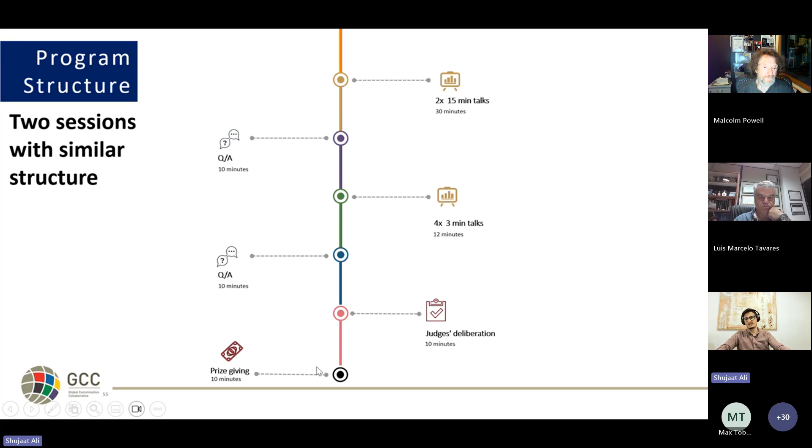And then this will repeat for a second session. At the end of the event, there will be a prize giving for 10 minutes.

A bit of information about our judges. I think it's important for you to know who is evaluating you today, and also your moderators. So in your judging team you have Professor Holga, Professor Malcolm Powell, Professor Rodrigo, Dr. Grant Valentine, and Dr. Sherry.

And please, again, try to enjoy your talks. It's a very comfortable, relaxed environment. Don't feel pressurized, get the most out of it, and present the best way you can.

As for moderators, it will be myself, and I'll be accompanied by Maximilian in the first session, who will be moderating that. After that, I will show up again for the second session and moderate that.

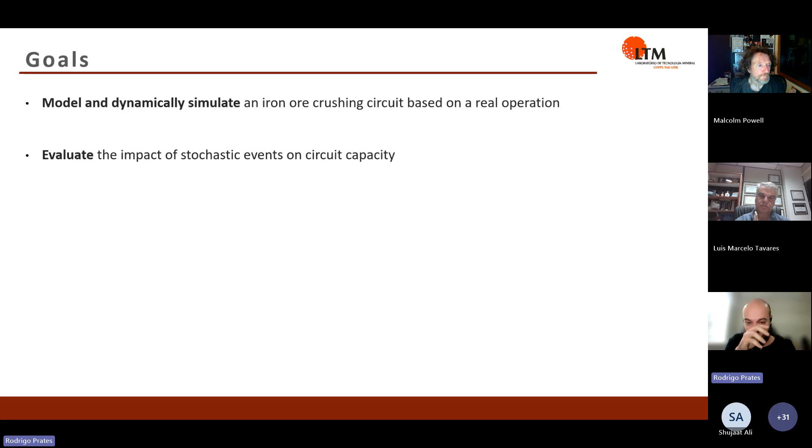So the goals will be to model and dynamically simulate an iron ore crushing circuit, and then to evaluate the impact of these stochastic events on the capacity of this circuit.

Then the product of the secondary crushing stage goes to a set of 12 silos that will feed two deck screens, where the material retained on those decks goes to the tertiary and quaternary crushing stages, and the product of both of these stages comes back to the screening to be classified again. Then the passing material on those screens is the product of the circuit and goes to the grinding stage.

So on all of the crushing stages and screening after the stockpile, we have a system of trippers that are responsible for distributing the material alongside the silos, and that is done by a control system that works based on different sensors alongside the circuit.

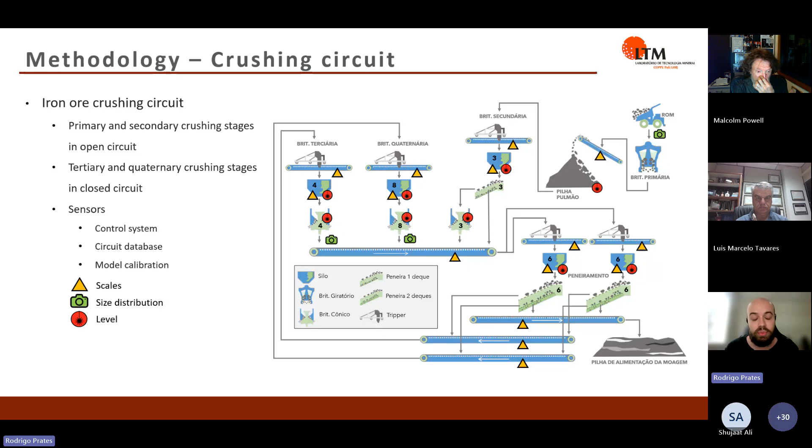So we have scales on all conveyor belts and feeders, also some level measurements and size distribution sensors as well. The control system uses all that information for the operational logic, and also to build up a circuit database that we use for model calibration.

So the idea was initially to do the mathematical modeling of the circuit, so the unit operations divided into dynamic and pseudo-dynamic units, then the operational logic being this control system, and then the stochastic events that would be the truck arrival and operational shutdowns.

Then we implemented the circuit on the MATLAB Simulink platform. With that, we can go for the model calibration that uses this database. We have over 1 year of information, both from all of the sensors and from stochastic events.

And with that, we go for the simulations of the circuit. So we used Monte Carlo simulations, 150 simulations of 30 days of operation, both for the circuit I just presented and for a modified version of it that I will talk about a bit later.

So to talk about the mathematical modeling of the units: for units that have a material residence time of minutes going up to hours, like silos, conveyor belts, and stockpiles, we used dynamic models. So we have material accumulation. And here I would like to highlight the modeling of the stockpiles and silos.

They are basically a first in, first out model, where the units are represented by a sequence of perfect mixers. For each mixer, we are solving the differential equations for mass balance, size distribution balance, and other properties. And for the conveyor belts, we are using a fixed time delay.

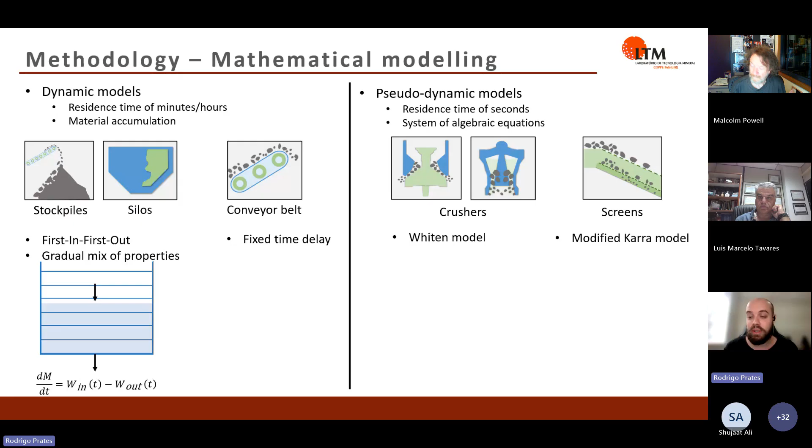And for the stochastic events, in the case of truck arrival, we are modeling the time between trucks and the ore mass per truck. For the operational shutdowns, we are talking about preventive maintenance, so scheduled maintenance, and also corrective maintenance that comes from failures. In this case, we are modeling the time between failures and the time to repair.

And to model all of these, we used the Minitab software to determine what was the best distribution in each case, so log normal distribution, Weibull distribution, and so on.

What I would like to highlight here is that if we do not model any of the operational shutdowns, the mean capacity of the circuit is around 2,900 tons per hour. This is a number I will come back to later.

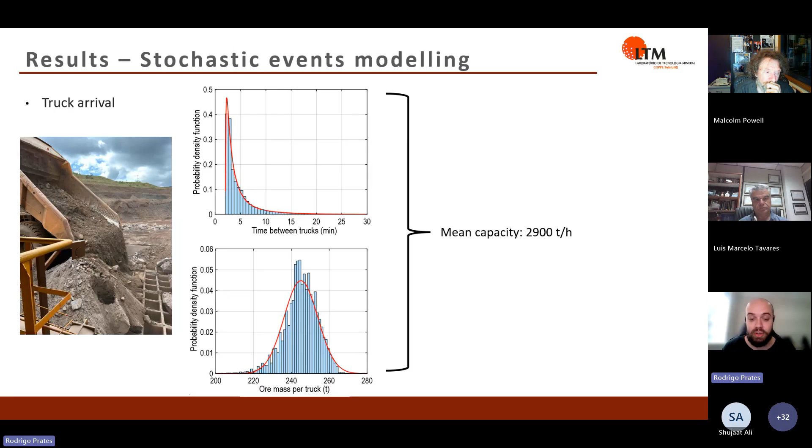The same thing happens for the primary crusher and the conveyor belt that transports the primary crusher product to the stockpile. So we grouped these equipments, and for each of these groups we have scheduled maintenance of 12 hours, and we also modeled the failures and corrective maintenance, so we have the time between failures and time to repair for both of them.

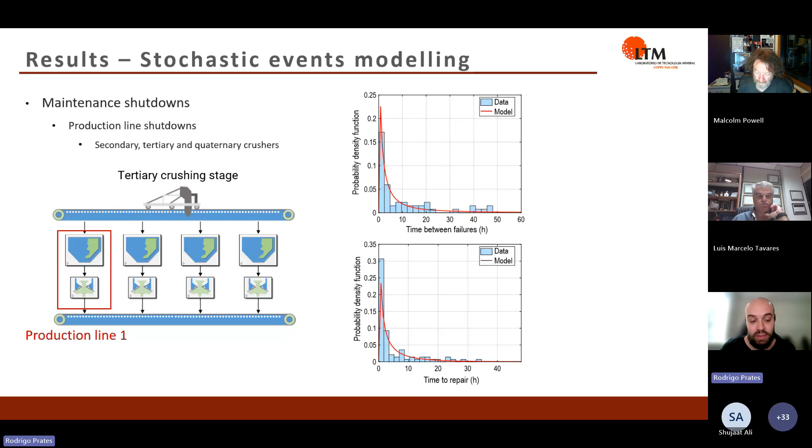Lastly, we also modeled the breakage of the other crushers, so secondary, tertiary, and quaternary crusher. But in this case, if one of these crushers fail, we don't need to stop the whole, for example, the whole tertiary crushing stage. We just need to stop one of the production lines, and it can be repaired.

During some times, for example after 48 hours of simulation, up to 60 hours, we don't have any material coming into the stockpile. That happens because we have some operational shutdown happening on the primary crushing stage, so that's why we have this stoppage.

For the discharge of the stockpile, on the other hand, it is made by a set of 6 feeders that are under the stockpile, and the number of feeders operating in parallel at different times depends on the stockpile level, which is controlled by some operational logic. That's why you see sometimes a discharge of around 3,000 tons per hour, and sometimes it decreases. Close to the 60-hour mark, it even got to 0, probably because the stockpile level got too low.

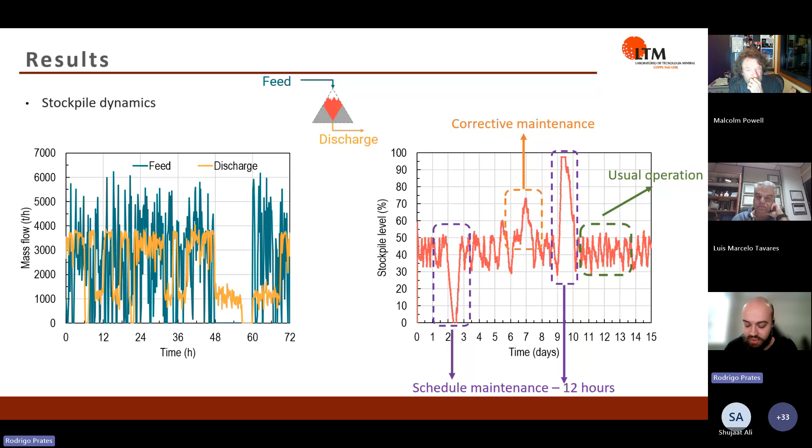But something we noticed is that the failure of individual crushers had no effect on circuit capacity, and that happens because this circuit is overdimensioned. For example, we only need 2 tertiary crushers to be able to process the amount of material that comes into this stage, but we have 4.

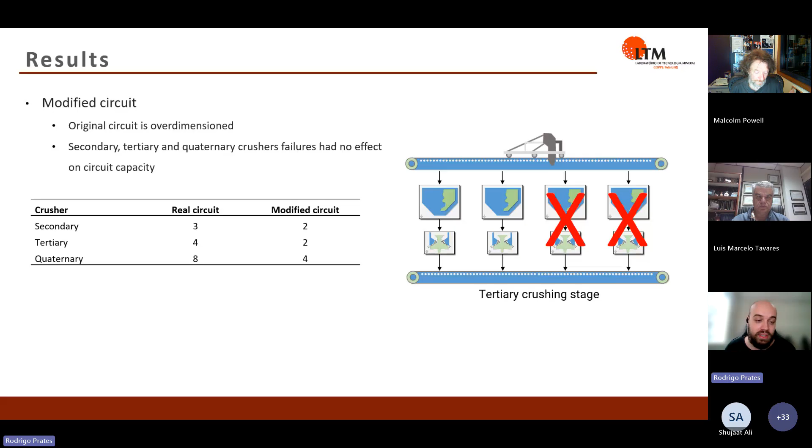So what we did was create this modified circuit where we reduced the amount of equipment. Let's focus on the tertiary for now, that goes from 4 to 2 crushers. And what happens in this case is that a lot of times we actually reach the maximum stockpile level because we need to stop the stockpile discharge.

Since these crushers failed, we don't have enough equipment to process the amount of material that is coming from the stockpile, so we need to reduce the capacity or stop the circuit during some time. With that, you can see that our monthly production decreases even more.

So for the original circuit without shutdowns, we have around 2,900 tons per hour, and we got up to 600 tons per hour less with this modified circuit with the shutdowns.

So some conclusions of this work. First, it was possible to dynamically simulate this industrial iron ore crushing plant.

The modeling of maintenance shutdowns led to a 16% decrease in circuit capacity, showcasing the importance of taking that into consideration. These simulations with a modified circuit showcased the importance of equipment redundancy to absorb these eventual failures. You don't need to use all 4 crushers, but if you don't have them, maybe sometimes you end up losing capacity.

For the future steps of this work, with the further development of the control system and addition of stuff like equipment wear, we plan to daily use the simulator as a digital twin of the circuits, both for supporting decision making and, in the end, maybe participation in the circuit's automation.

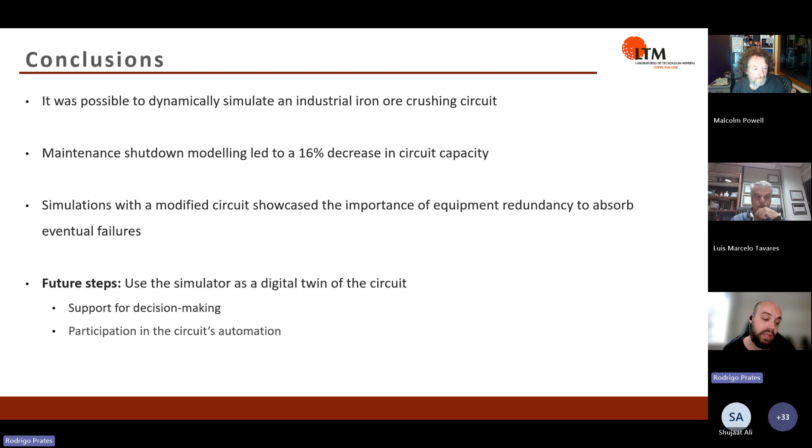Thank you, Rodrigo, for this nice talk, especially regarding the time in Brazil, 6 a.m. Very interesting talk, and also congratulations on finishing your masters and now working as a PhD. I would like to encourage people to send their questions into the chat. And perfect timing, Rodrigo. Next on the stage, I would like to welcome Kabeli from UCT. The question session will be after the talk of Kabeli.

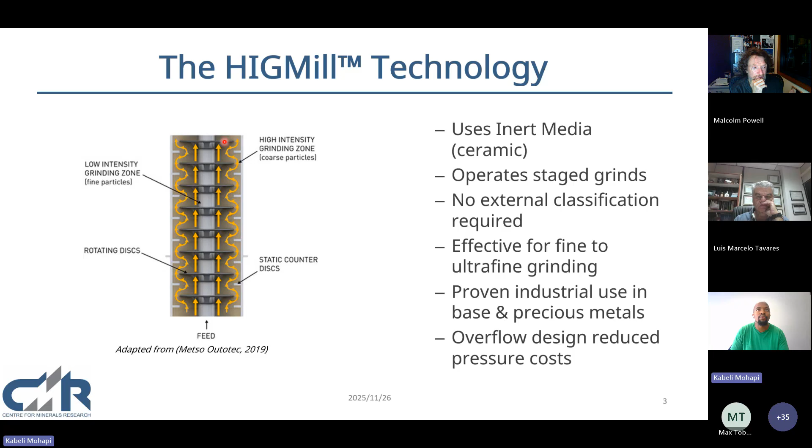The application of stirred milling in the mineral processing industry has seen significant growth, inspired by Anglo Platinum, which is now Valterra. They utilize an ISA mill, which has been proven to enable tailings retreatment on oxidized and slow floating PGMs. Its application in the PGM industry includes mainstream inert grinding, where they optimize recovery, and ultrafine grinding, where it is utilized to optimize grade.

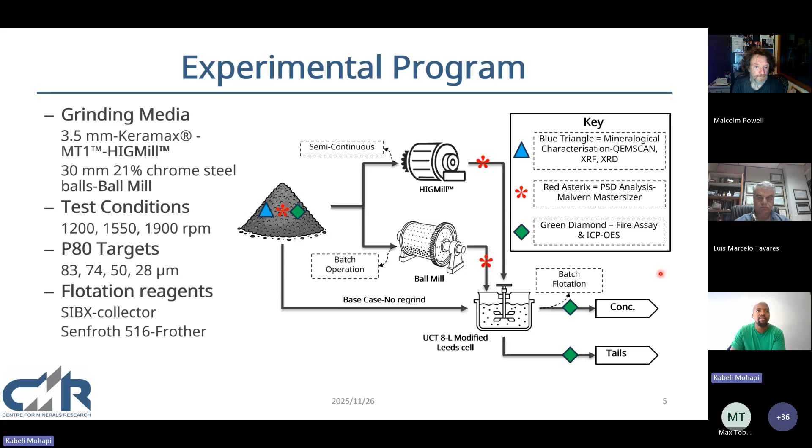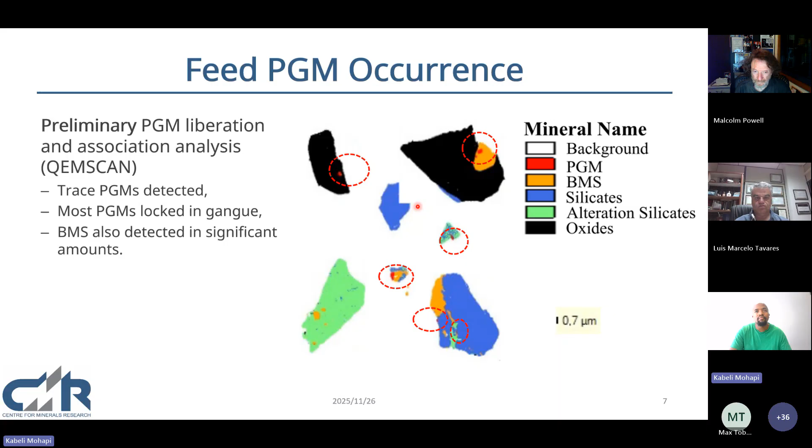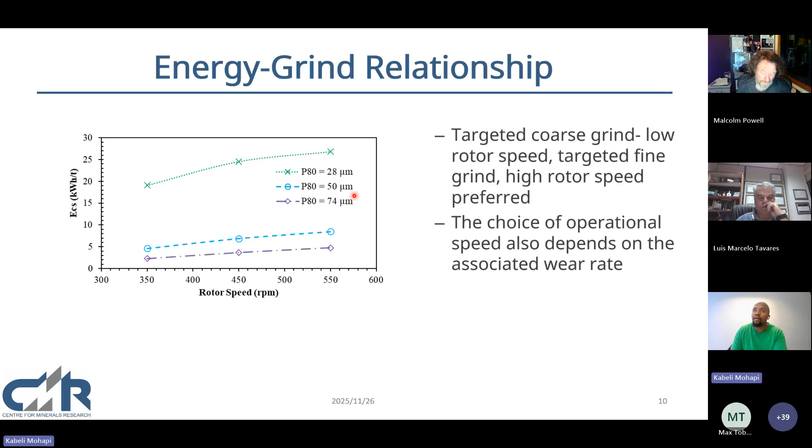However, as much as this data could show that operating at high speeds in stirred milling would be beneficial, there's also a potential impact of grinding media wear and equipment wear, which was outside the scope of this research. Hence, although it's possible to go very high in rotor speed in stirred milling devices, sometimes it's not necessary, as it could lead to other costs, including wear rate and machine wear.

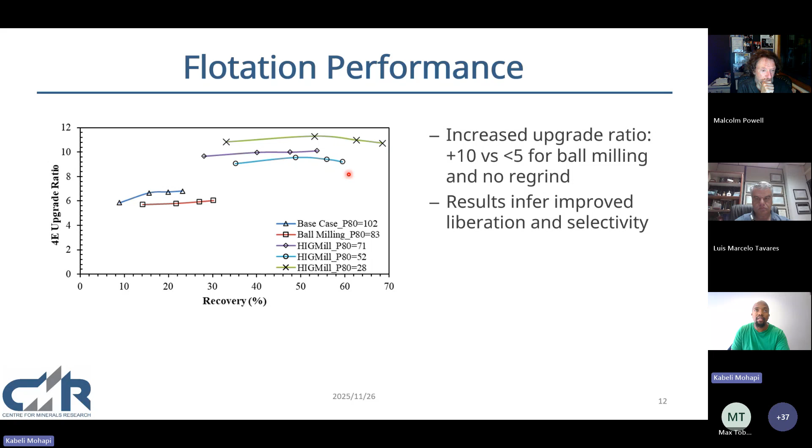Okay, I'm almost there, this is the second last one. In this graph, we show the relationship between the upgrade ratio and the recovery for 4E recovery. We can see that the upgrade ratio achieved in stirred milling is significantly higher than the upgrade ratios achieved in ball milling in the baseline condition.

With that, the authors did conclude that although there could be improvements in ball milling, they are limited by the residence times usually required, resulting in minimal recovery improvement. Stirred milling showed high improvements and was very efficient in energy use. We recommend performing more studies on other stirred mills, as in this study we also used the HIG mill, another mill which showed a similar response. Thank you everyone.

Okay, thank you. So the timer was still okay.

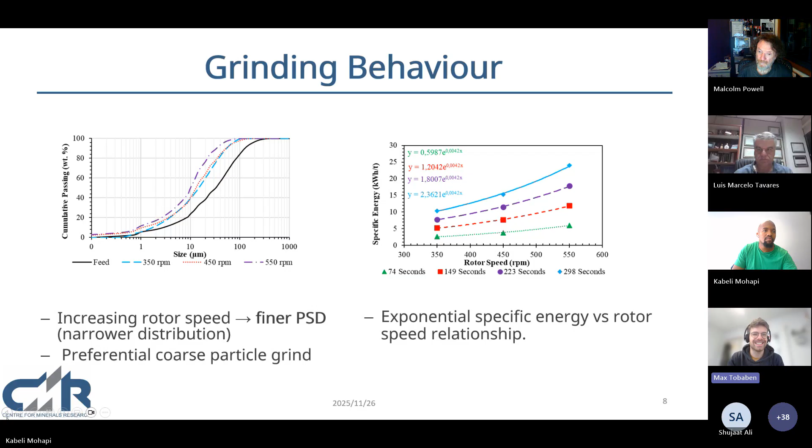Grant has a question. He's asking, given the small reduction in throughput with half the installed crushers, would you recommend installing standby crushers in the application? So, this specific circuit is way over-dimensioned, because we had some conversation with people from the operation about this, but they were planning - they thought a crusher would have a capacity of 400 tons per hour, and it ended up being double. So it's way over-dimensioned, but even so, I think having at least one crusher as a standby is always beneficial, especially thinking about the future, with more competent mineral coming into the circuit. So even though right now the decreasing capacity is not that high, to have it for the future, I think it's very beneficial.

Okay, Professor Lieberwirth, do you want to comment on that? You're raising your hand. Yes, I have a question. Rodrigo, that's an interesting topic. Did you ever look at the feed particle size distribution which is acceptable to these crushers in comparison to the secondary crushers? Because typically, if you have underutilized comminution steps, it might be interesting to shift more work to these steps by essentially opening up the secondary crushers, and so you might increase the capacity of the whole line this way.

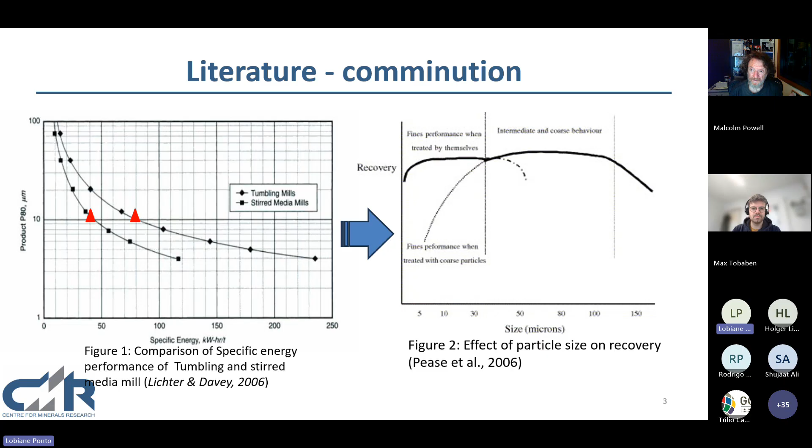And so we are using the stirred mills because we know that they achieve fine materials at lower specific energy, and also because they produce a controlled particle size distribution, which is able to be managed by the flotation side of things, where they can manage lower P80s as opposed to a wide range of particle size distribution. My experiments include 27 experiments of grinding both the slag and the tailings, then the ground material being floated, and the concentrate will be leached to assess the recovery.

These are the kind of preliminary results I have from grinding the tailings. It shows that I have a reduction ratio of about 9 for using 3.5 millimeter ceramic media. It shows that the media sizes of 3.5 and 2.8 millimeter show similar product sizes.

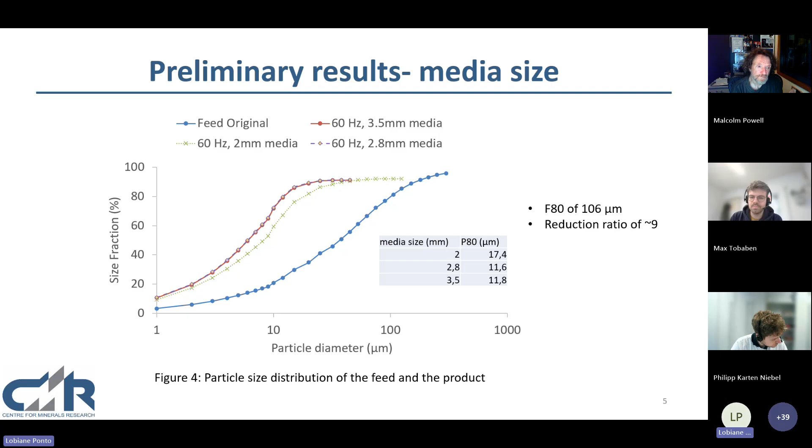On the specific energy, it shows that the increase in media size increases the specific energy. On the P80 side, it shows the opposite - the higher media size, which is 3.5, produces smaller P80 sizes. That's it for the snapshot of my investigation. Thank you.

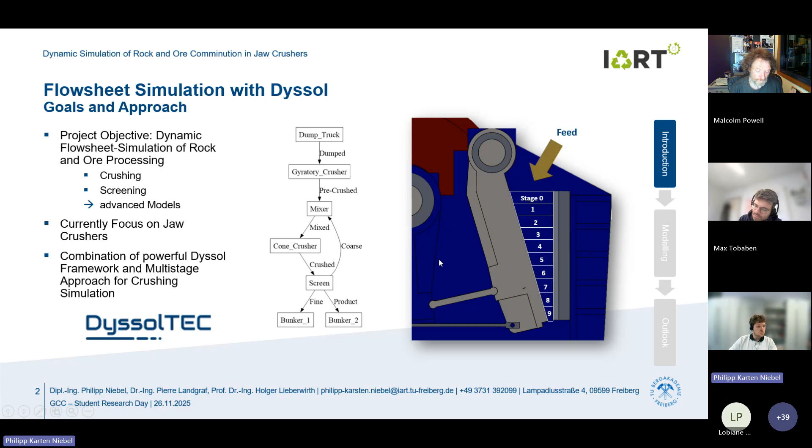So the crushing chamber of the jaw crusher is divided into a number of crushing stages. I do this with the help of a transport model. Based on the crushing kinematics and the geometry of the crusher, the number and the geometry or the parameters of the crushing stages are calculated. Each of these stages consists of a selection, a breakage, and a classification function.

On top of that, I also added a time delay unit in the Dyssol model so that I can calculate not only the particle size distribution, but also the residence time, which I think is a little bit more interesting and new. That is why I brought a first example, which you can see here on the slide.

In the example, I fed petalite particles into a double toggle jaw crusher singly, and I measured the residence time manually by listening to the jaw crusher. This is a problem, so the plot has, I would say, limited meaningfulness because the measurement of the residence time is not really accurate.

But as you can see, the tendency of the influence of particle size on the residence time of particles in the crusher is predicted well. By the way, of course, the particle size distribution is also predicted well.

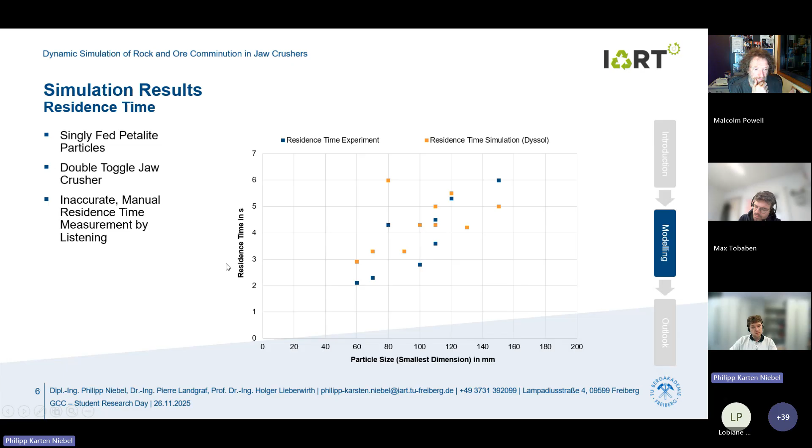Also as next steps, I want to test the model for gyratory or adapt the model for gyratory and cone crushers. And I want to develop advanced models for screening machines as well as for impact crushers to depict complete flowsheets dynamically. So that's all, thank you from my side.

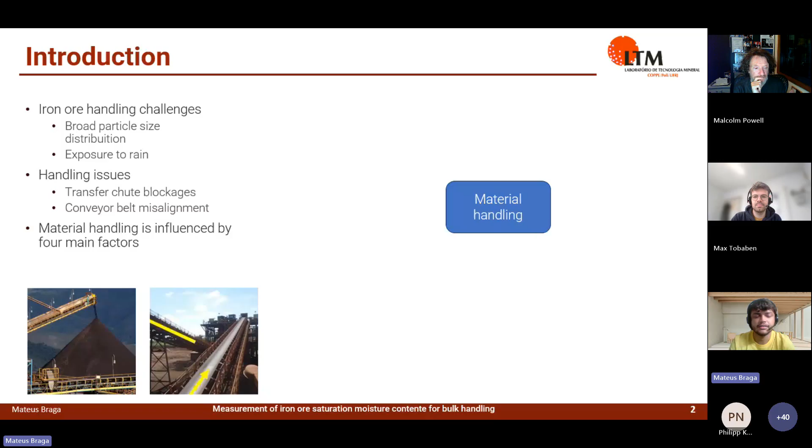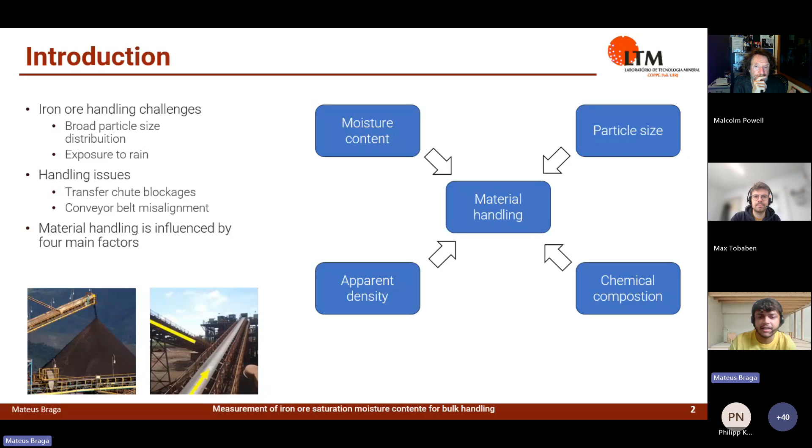To begin, iron ore handling presents some challenges. The material contains a broad particle size distribution and is exposed to natural moisture content and sometimes to rain. These characteristics can lead to handling issues. Common operational issues in handling operations are transfer chute blockages and conveyor belt misalignment, and material handling is influenced by four main factors, which are moisture content, particle size, apparent density, and chemical composition.

The objective of my work is to establish a methodology to determine the saturation moisture content of different iron ore samples and correlate the chemical composition of the samples and particle size with the handling behavior. I worked with two different Brazilian ores that have different particle size and chemical compositions.

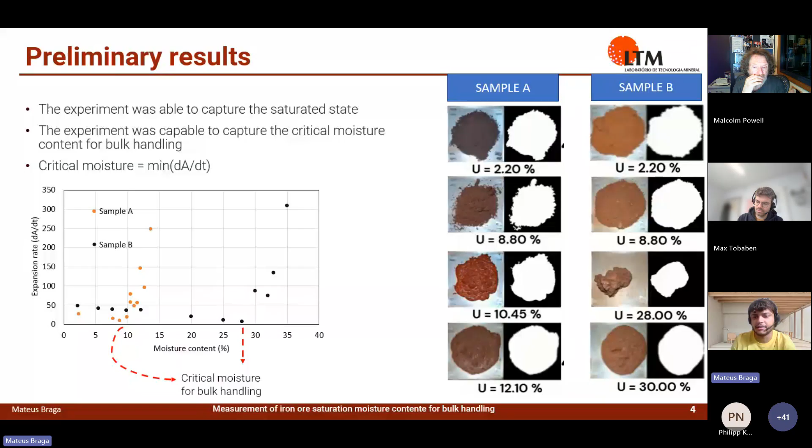And here I have the results for saturated samples. We can see the water reflection in the video, and we can establish that the iron ore pile is saturated.

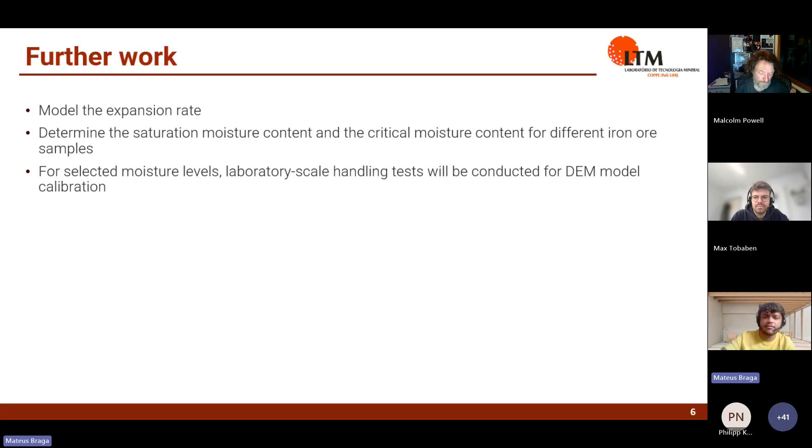For further work, the next step is to model the expansion rate, determine the saturation moisture content and the critical moisture content for different iron ore samples, and for selected moisture levels, laboratory-scale tests will be conducted for DEM model calibration. The acknowledgements. Thank you, everybody.

Thank you, Mateus. Thank you. And last but not least, it's Tulio. Can you see my screen, Max? Yes, yep, and we can also hear you. Is the presentation mode okay? Everything is good, yeah. Okay.

All right, so hi everybody. I'm Tulio Campos, a PhD student at the Federal University of Rio de Janeiro in Brazil. Today I will present the work Real-Time Simulation of Stockpile Level Dynamics in Comminution Circuits.

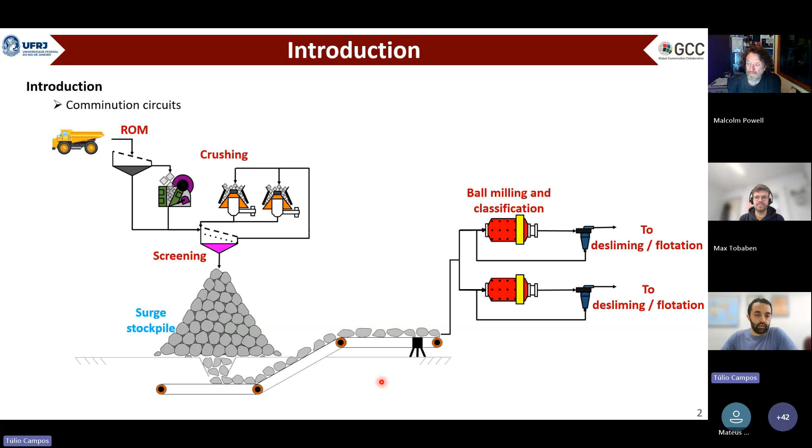Data was collected from the process and relied on solid flow rates and operational shutdowns from crushing and grinding circuits, with these operational shutdowns divided into three main groups: unplanned, planned, and stockpile level shutdowns.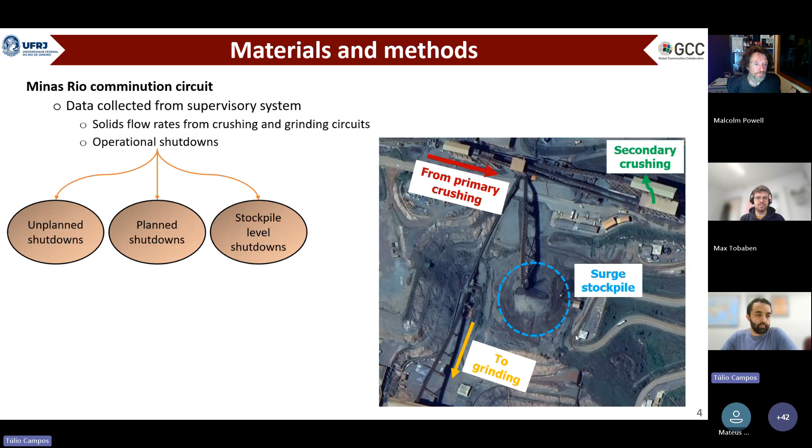To describe this stockpile level dynamics mathematically, we are proposing this hybrid modeling approach divided into three main modules as presented here. The first one relies on the Monte Carlo algorithm in order to predict the solid flow rates and was calibrated based on historical data from the process for both crushing and grinding stages.

After predicting these solid flow rates, we can incorporate the unplanned and planned operational shutdowns in both stages. By the end, the last piece of this puzzle relies on a deterministic part of the model with a mass balance and a stockpile level control in order to predict the mass of material on it, and the operational shutdowns associated with stockpile level will be an output of this model.

In order to apply the model and demonstrate how it is used, two case studies were simulated. The base case relied on almost equal average feed and reclaimed solid flow rates, as presented here.

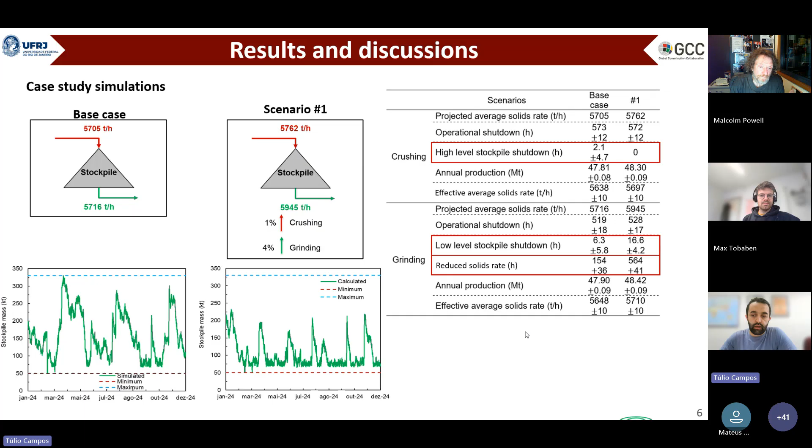Scenario one was basically the idea to increment by 1% and 4% with respect to the base case, the average solid flow rates being fed and reclaimed from the stockpile. With this model, we can see the profile over a 12-month period, highlighting the differences between base case and scenario one. The model could also predict operational shutdowns caused by problems with stockpile levels. It was interesting that although a 4% increment was designed in the grinding circuit for scenario one, only 1.1% was really reached given the limitations with low stockpile levels.

The modeling approach demonstrated the ability to capture real-time variations in surge stockpile level dynamics. Different operational scenarios revealed distinct stockpile behaviors, and the hybrid modeling approach showed potential to be applied as a tool for investigating different operational scenarios and strategies. So, thank you.

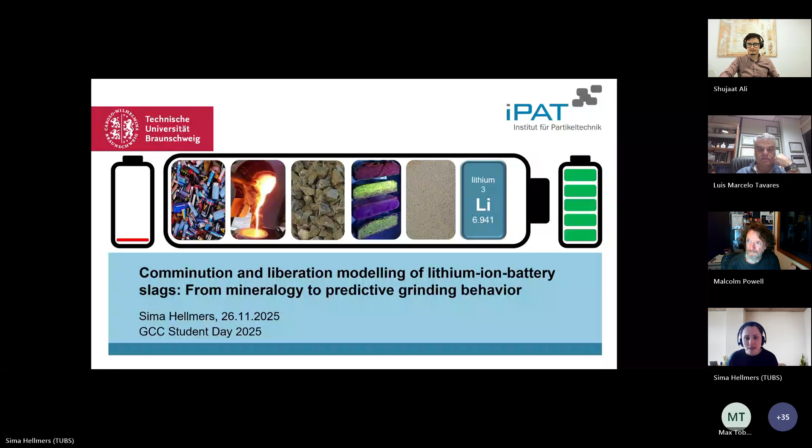Thank you, I hope you can hear me and see my screen. Yes, all loud and clear. Okay, thank you so much. So I will start here, welcome to my presentation. Today I'm going to talk about the comminution and liberation of the slags. About me, I studied material science and engineering and mechanical engineering, and I'm from TU Braunschweig, Germany. I started my PhD in 2022, and my topic is comminution of slags.

So we already heard a bit about slags, but let's see what it is exactly. Basically, it's a byproduct of primary or secondary production of metals, from ores or recycling. Most of the time it's used in construction materials, but recently the focus has been to use it as a secondary source to recover valuable material. To achieve this, there was the idea of engineered artificial minerals. We have this slag that is really hot, around 1000-2000 degrees, so we use thermodynamic modeling and control our cooling so we can have our target elements in certain phases. Then using optimized comminution and liberation methods, we can get to our target particles.

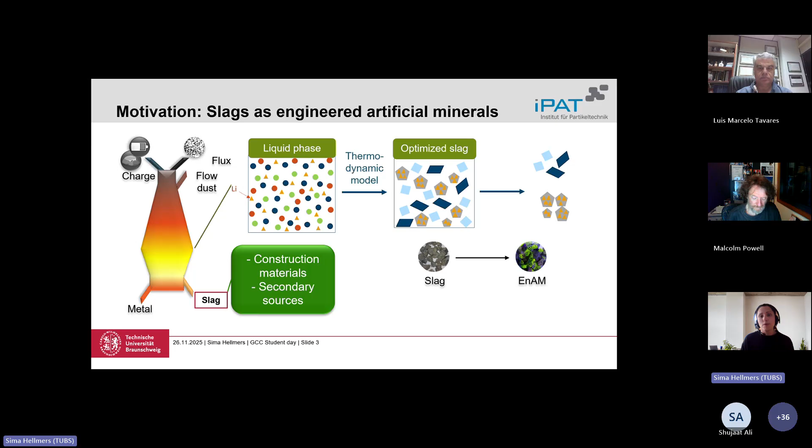So it looks a bit like the ore industry, what they're doing, but it's not that easy, and I'll tell you why. If I compare the nature of ores and slags, in ores we have a long time for the phases to form, so everything is predictable. They have nice crystalline forms, and over time we have well-established processes for different elements. On the other hand, with slags, even the engineered ones, we can control the cooling, but the grain boundaries are still sharp. We have dendrites around the cubicles, a lot of amorphous phases, and a lot of mixed crystals, so it's not that easy.

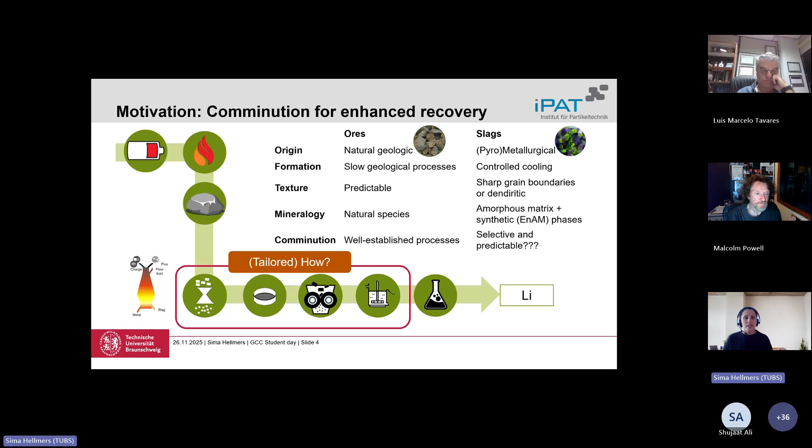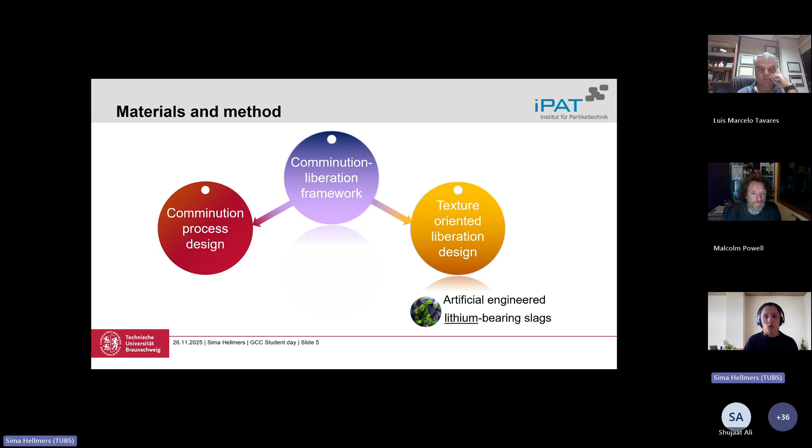So the question is, can we use the processes we already have on the slags? And even if we can, how can we tailor it so we can optimize the whole process? That's the focus of my study. So how to get there? The first step is to develop a framework that connects comminution and liberation. Based on this data and having the framework, I can design my comminution processes from crushing to fine grinding. Then, based on the results, I can understand how to optimize the whole process and improve my results from the point of view of energy and recovery. So let's move to the first one.

The first step was the comminution liberation framework. For this, I used different slags, mostly synthetic, where different oxides were used to produce a slag similar to lithium-ion battery recycling slag. The main phases were lithium aluminate oxide, lithium aluminate, and eucryptite as phases containing lithium, and gehlenite as the gangue material. I used several different crushing steps until I got to 500 microns, and then different feeds using a double roll mill to have a very narrow distribution of particles, so I could study the effect of particle size in flotation.

How did it work? There were 3 different parameters, one of them being the speed of the roller. The idea was to use different gap sizes and different rotational speeds, and also change the mass flow. What could be measured was the specific energy, to see which of these variables are efficient and which are not.

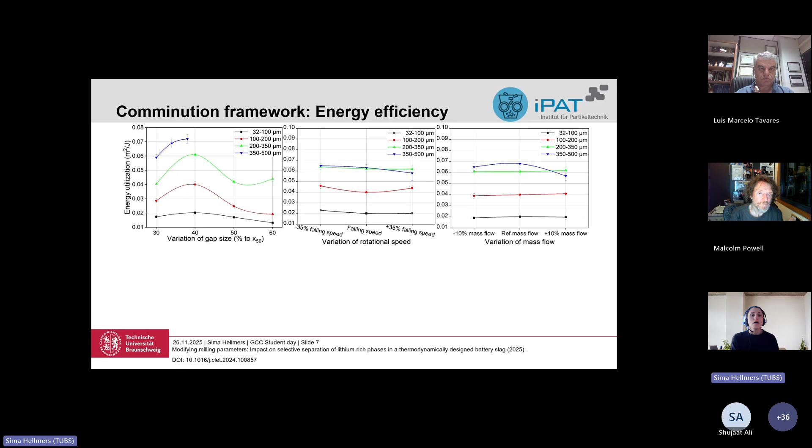So let's look at the different processes. We can see that if we define energy utilization as the energy needed to produce new surfaces, the more it is, the more efficient our process is. There are 2 aspects that play a very important role: one is the feed size we have, and the other is the gap size relative to the feed size, changing from 30 to 60%. The mass flow and the variation of circumferential speed did not play a strong role in our energy efficiency. So what happened there?

We produced different sizes and then fed it to the flotation cell to see which one was more efficient.

To look at this, the first step was flotation, and based on what was in the flotated part, that was our target—our first target was lithium aluminate. This one was done and then added to the leaching.

The best size that we had was around under 100 micrometer, and they had a very high yield, meaning a lot of material was flotated. But when we introduced it to the leaching, we realized we don't want a lot of gangue material in our feed. So the best recovery rate was over 30 micrometer.

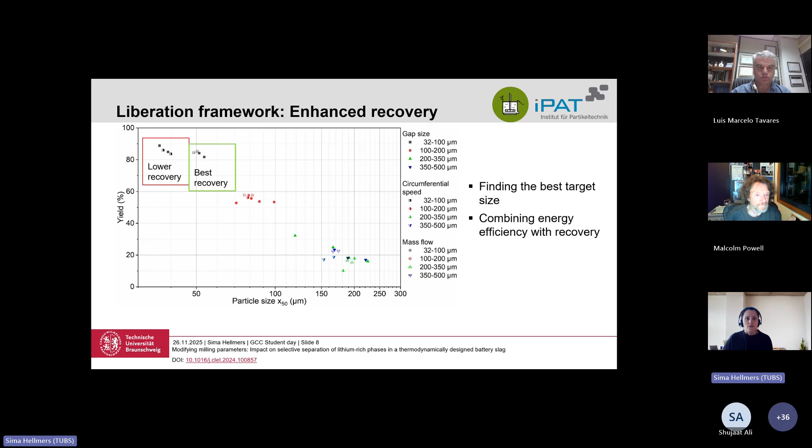The flotation target phases that we used were lithium aluminate, or eucryptite can be used as well. We had a framework and a window to work with—whatever under 100 micrometer—and we had the parameters for our roller mill. So let's look at the next part.

We have a target size and we want to reach it using different mills. We can start like usual ores, with a jaw crusher, and keep reducing the size using secondary crushers like impact mills and roller crushers, then using the finer particles below 500 micrometer, send them to another roller mill and grind to reach our particle size. Of course, most of these processes were just done once, as a single pass, not in a circular way.

So at the end it could be suggested that there is a circuit for the fine grinding, because we need to grind and grind and grind to achieve our target size. Of course, we can put different classification methods and increase our recovery. My focus here would be on the secondary crushing and grinding.

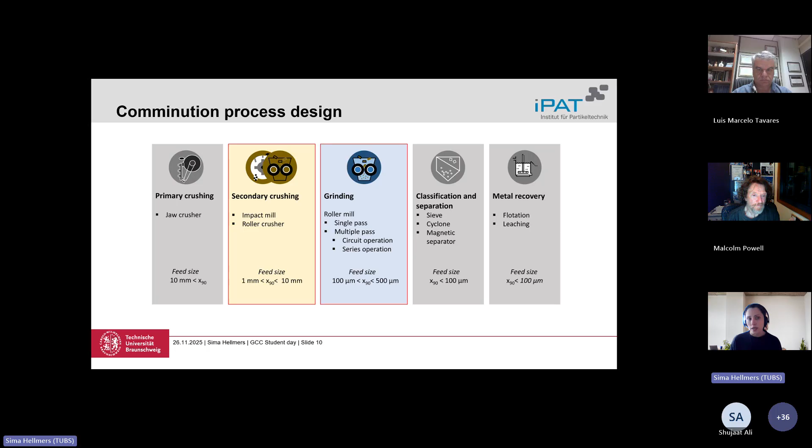So what we had was 2 crushers: one an impact crusher, the other a roller crusher. Three different feed sizes were studied, from 1 millimeter to 1 centimeter. Then the size-specific energy was calculated to see how efficient our process was, and the focus was to achieve the 100 micrometer target.

Why didn't we use the surface? Because the particles were pretty big, so it was difficult to measure the surface. So in this case, we use the size-specific energy, and the higher the size-specific energy is, it means we are putting too much energy to produce the same fines.

As we can see, impact is not that efficient, but when we look at the compression, for the higher and bigger feed we have the same behavior. Only when we look at the 1.7 millimeter feed can we see a better energy efficiency.

Another thing we saw was that with an impact mill for the larger particles, around 1 centimeter, the particle size distribution was a bit strange. There were really big particles, and then very fine particles around 1 millimeter.

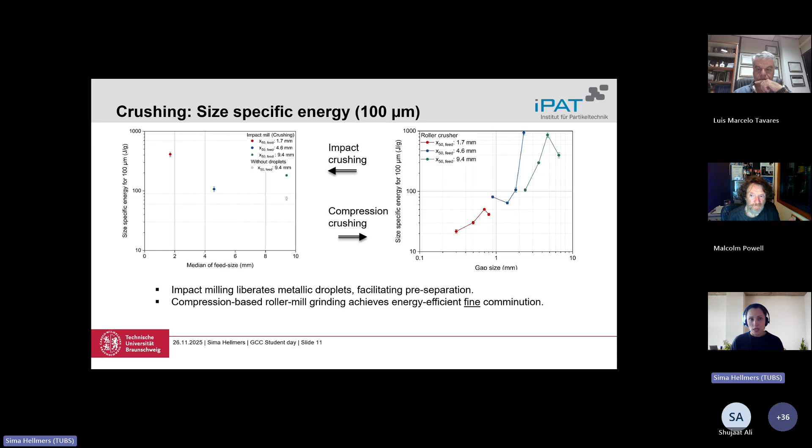And then we use a roller mill to reduce the gap size step by step and reach our target size. So let's look at the comminution process if we had a circuit for the fine grinding.

There were two options we had. One was the circuit operation: we had a feed size, a specific gap size with a certain circumferential speed, and we did the grinding. Then we had our target size of 100 micrometer. We sieved this part, separated it, and added exactly the same amount of product to the new feed, and then with the coarse particle we did the grinding again. This was done again and again and again, until a stationary state was reached.

The other approach was a series of operations. We had a feed part, and set the gap size, ground the material, but did not sieve. We just analyzed the particle size distribution and adjusted the gap size and speed based on this new product, then adjusted several times until the whole material in the system reached the desired particle size.

So let's look at the energy values. The first one was the series, that is, we had multiple passes and we didn't do any classification. As we can see, by increasing the stressing event from the first to second to the third, the energy increases because the defects in the material are reducing.

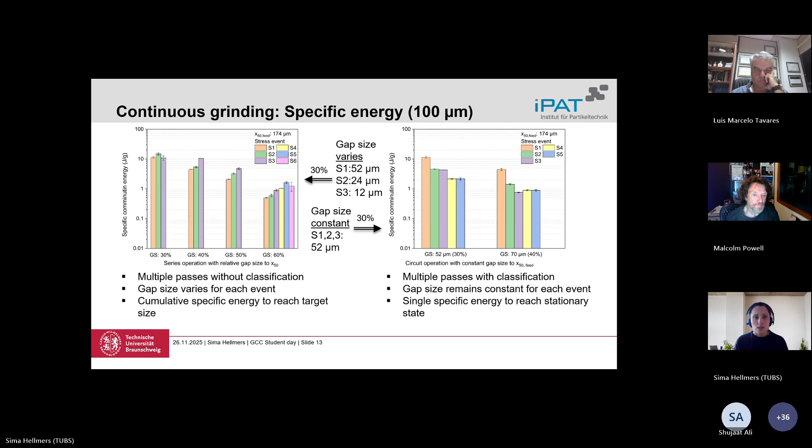So how do we evaluate our process? We use the size-specific energy, like for the crushing. Here we have a sum of specific energies for the series, but for the circuit, we saw that after repeating the third or fourth time, we do not need to repeat it. The amount of the product would remain. So we take this as our yield, and we just take this energy and then calculate our size-specific energy.

And we can look at the energy utilization, and we can see that basically by increasing the gap size, the energy utilization increases, but then we have less product. So for the larger feeds, we can use the series part, and then for the smaller feeds, we need this constant. We can keep on sieving and then reaching our target size.

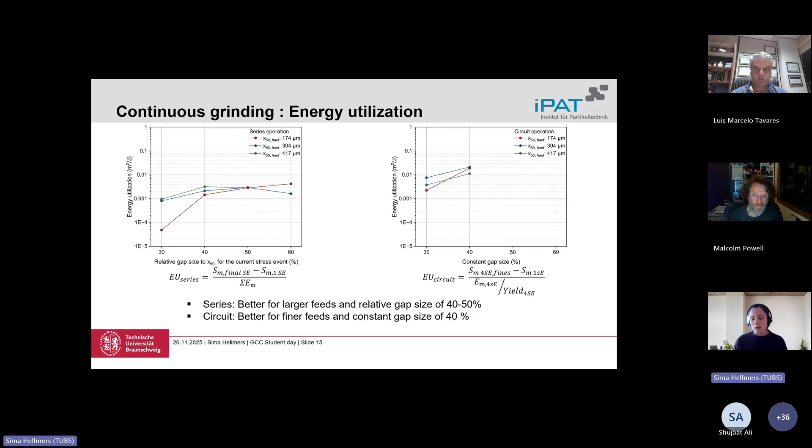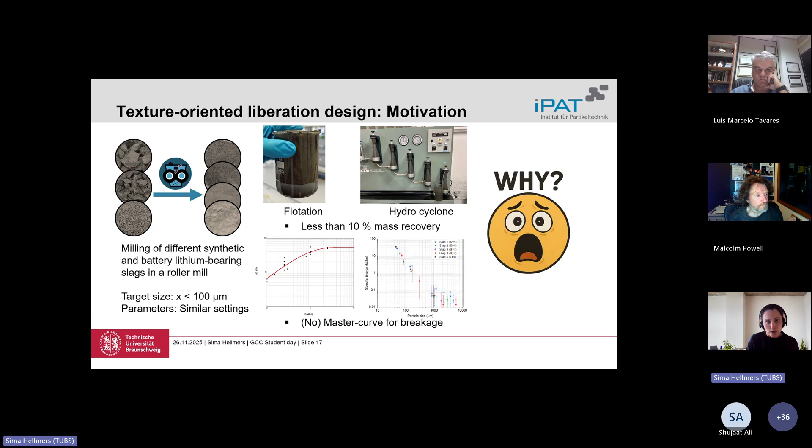So we have the comminution process with the circuits that we can use to get our target size. That was the positive part of the flotation, but we used different slags, and there was something that went wrong. Like we had a flotation for some slags that didn't work at all, or we tried to use a master curve for the breakage, but it didn't work. So the question was, what happened? What was wrong?

Let's look at it differently. So we used mineral liberation analysis to look at the slag again and see what happens on the surface of the particle. Are we just reducing our particle size, or does something happen on the surface?

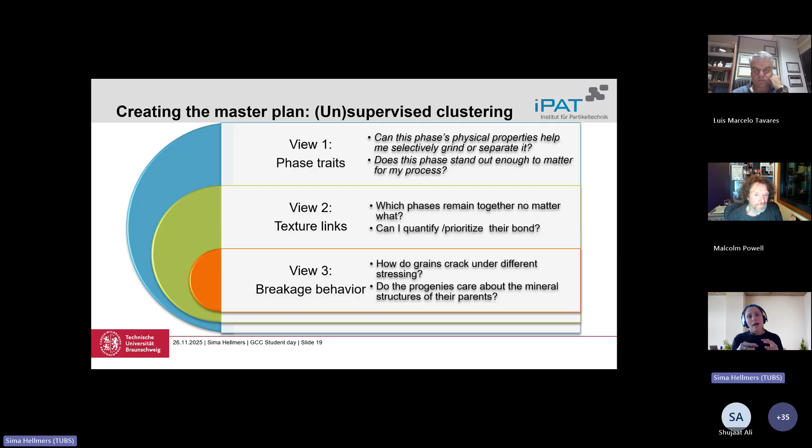Okay, sorry. So to sum it up, here we use this texture analysis to develop a method that clusters all the phases together, and then based on these, we can look at different values and put different phases together and design the process again.

So we can use three different views, from the phase traits, from the textural links, and from the breakage preferences, to see how the process changes based on these points, and then use different clustering methods like K-means and graphical based similarities, and build our view.

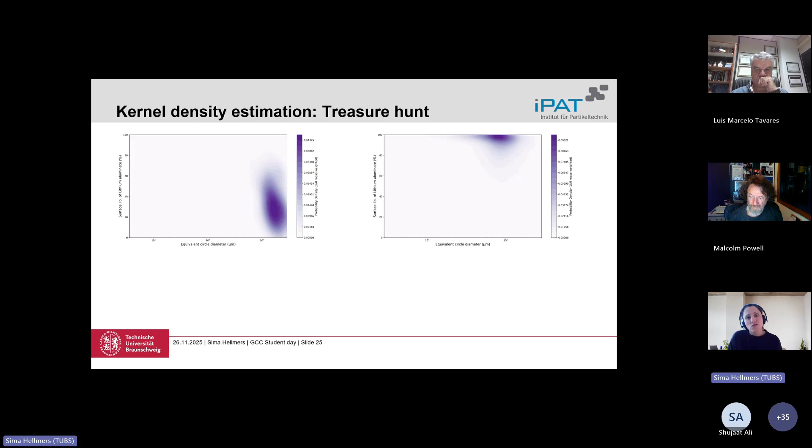And then we can see, okay, where are our phases? Where do we find them? Which particle size do we have? How are they liberated? Based on all these views, we can develop new processes and focus on different separation methods. What we can do later is put breakage models into this, or use flowsheet simulation, and then achieve better processes.

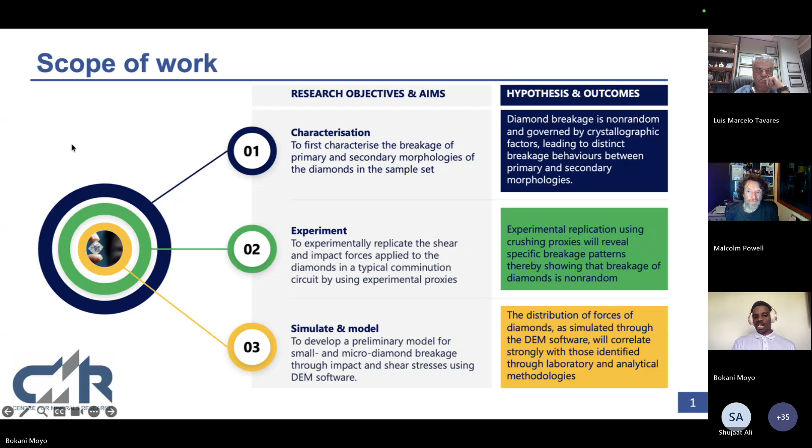So for today, I'll focus on the characterization of the sample.

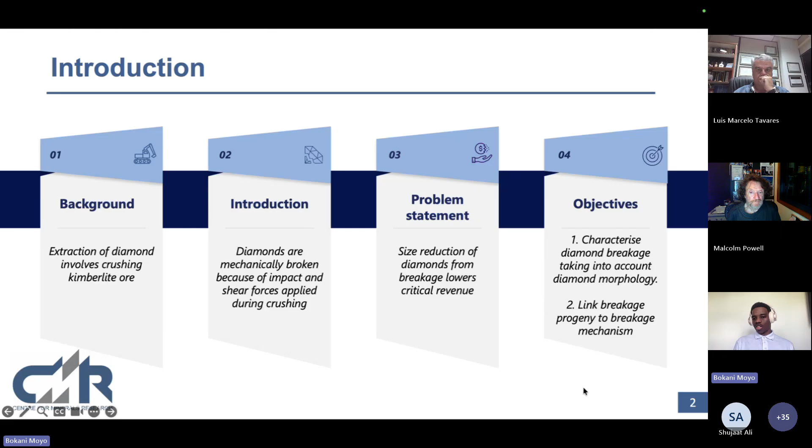A bit of background: extraction of diamonds involves the crushing of kimberlite ore. However, diamonds are mechanically broken because of impact and shear forces applied during this crushing. This raises a problem, in that size reduction of diamonds reduces your critical revenue. We mine precious metals for profit, so once you break these diamonds, you lower your revenue, and that becomes a problem. So the objectives of this section of the study are to characterize diamond breakage, taking into account the diamond morphology, and secondly to link breakage progeny to breakage mechanism.

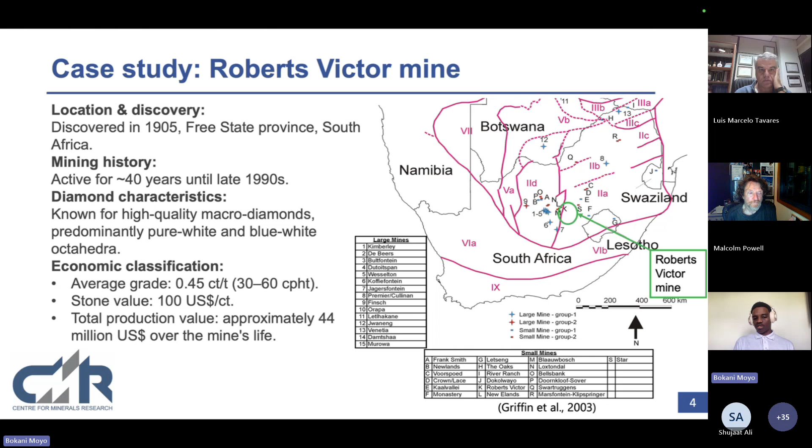The study is essentially a case study from the Roberts Victor mine, and the diamonds used in our sample are from this mine, which was discovered in 1905. Looking at the timeline, it's likely that the same processing plant I showed in the previous slide is essentially the same one our diamonds would have gone through. The mine operated for about 40 years, with an average grade of 0.45 carats per ton and a total production value of approximately $44 million over the life of mine.

A bit of background about diamond morphology: the shapes of these diamonds can be classified into some 5 broad shape classes. Class A is your primary octahedra, then you have your macel, which is B, and then you've also got aggregates. An aggregate is essentially where you've got 2 primary stones growing within each other, forming that shape. Then you get your secondary stones, which arise due to geological and chemical processes that essentially round the stone, creating a dodecahedron, and then tetrahexahedron, also known as THH shaped stones. You could also get irregular or broken stones.

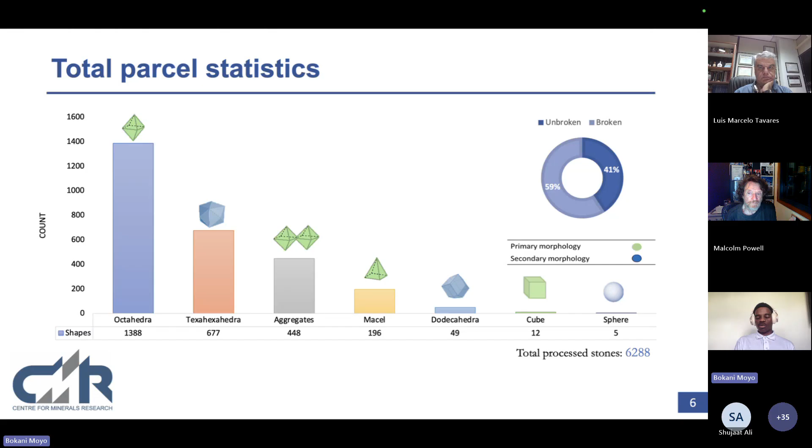We also employed various imaging techniques for the analysis. The first being optical microscopy, which allowed us to identify morphologies within the sample, identify the presence of any mineral inclusions, and tell what color our stones were. We also did scanning electron microscopy, which allowed us to identify surface features, identify cleavage planes, and differentiate between different inclusions, as we saw that you could not tell whether a dark spot on the diamond was a sulfide or a graphite inclusion. An inclusion in this case is essentially a mineral that grows within the diamond and usually has an area of weakness within it.

The third imaging technique we used is X-ray computed tomography, which allowed us to observe how fractures propagate within the diamond. We could essentially determine the depth of the fractures, the crack propagation patterns, and quantify these things.

So these are the methodologies that we use in our analysis. I mentioned before that diamond breakage has long been studied. There exists only one diamond breakage classification system, which was developed by De Beers in 1978.

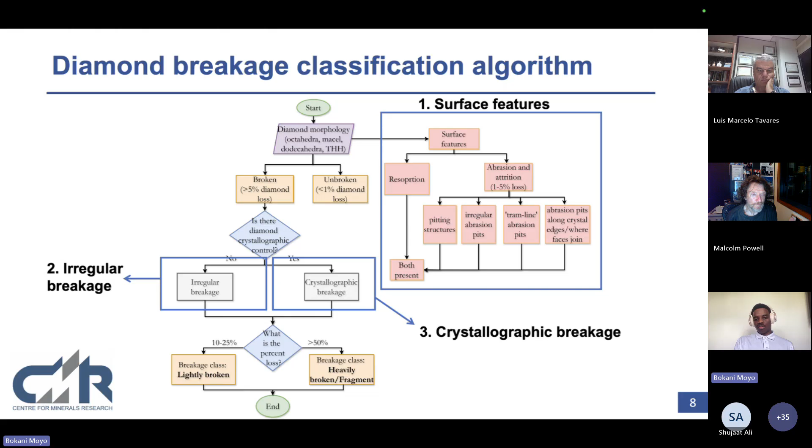So essentially we could group this classification algorithm into 4 parts. The first being the surface features, and then you have irregular breakage, crystallographic breakage, as well as a decision block, which I'll go through in the next slides.

With irregular breakage, you had essentially either random or coinchodial. Random being the breakage was not on a crystallographic plane, and coinchodial was more of a curve type of breakage, which we also noticed in the sample.

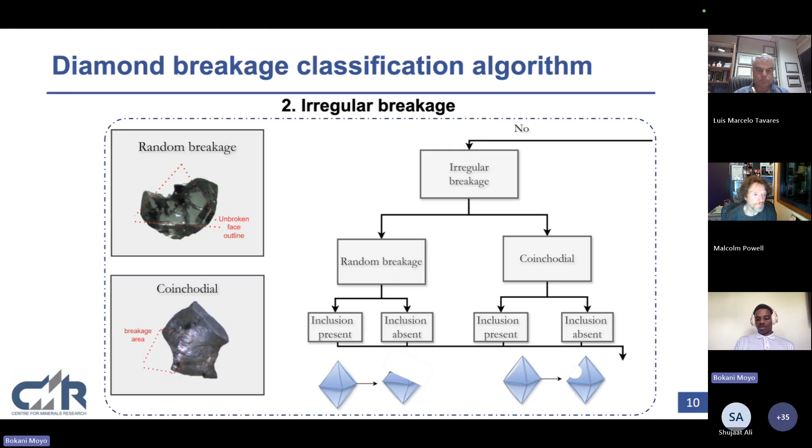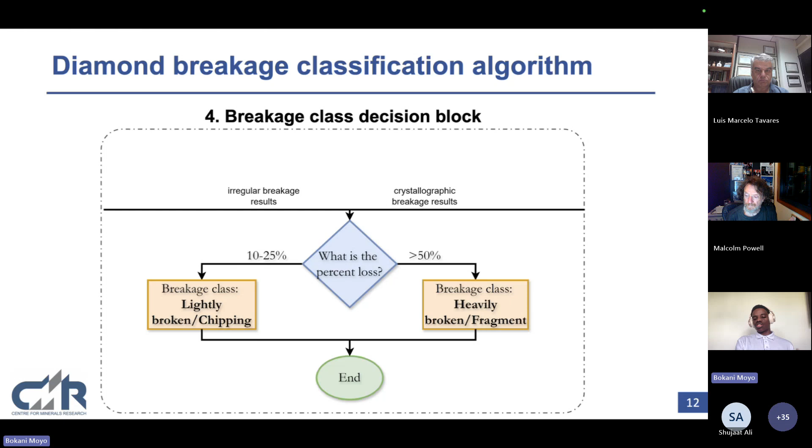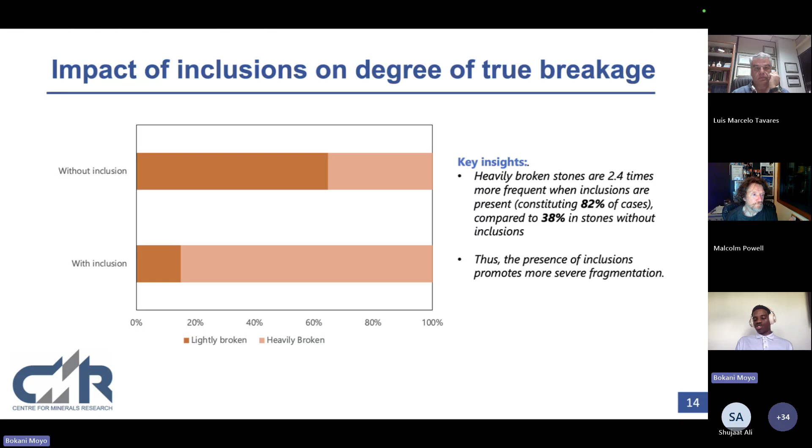I did mention what inclusions were - these are essentially regions of weakness within the parcel. We noticed that heavily broken stones were 2.4 times more frequent when inclusions were present, compared to 38% in stones without inclusions. Thus, the presence of inclusions promoted more severe fragmentation.

So essentially, conclusions from phase 1: the De Beers breakage classification system distinguished breakage severity by percentage loss, but it lacked correlation with specific comminution mechanisms. We established that breakage is not random - it's strongly influenced by the stone morphology. The primary morphologies mainly show crystallographic breakage, and inclusions drive random fracture propagation in these diamonds, causing irregular breakage.

So the existing classification system is rather descriptive rather than diagnostic, meaning it characterizes the breakage severity but does not reveal the why and the how - it does not reveal the underlying mechanisms of our breakage. So it's important to determine the mode of breakage to enable better process modeling and mitigation strategies.

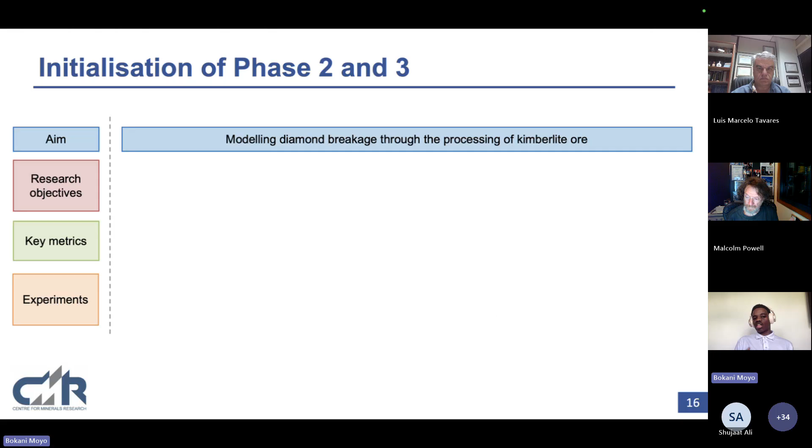Now let me take you through the initialization of phase 2 and 3, which is essentially modeling the diamond breakage. The aim is to model the diamond breakage, replicating the shear and impact forces I've mentioned already. The key metrics would be to determine the force energy level required to initiate the breakage and to reproduce the breakage patterns we noticed in the parcel.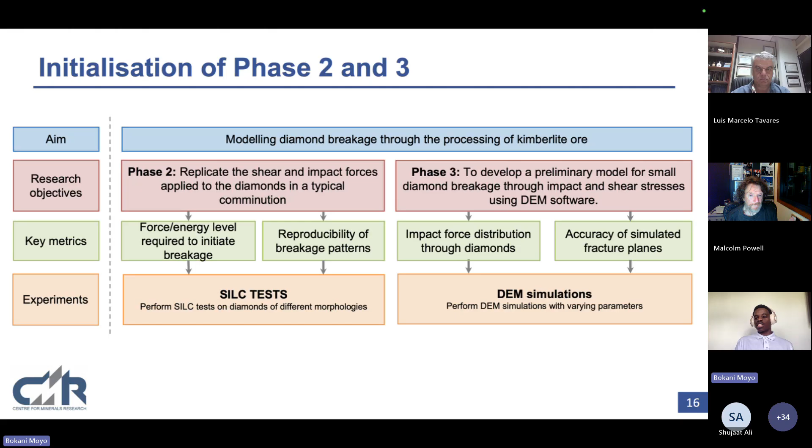And then in this phase is when we'll employ our short impact load cell tests on different morphologies. Our phase 3 is to develop a preliminary model for small breakage, diamond breakage through impact and shear stresses using the DEM software. What we want to get from this is impact force distribution through the diamonds and the accuracy of the simulated fracture planes, and this is where we perform our DEM simulations.

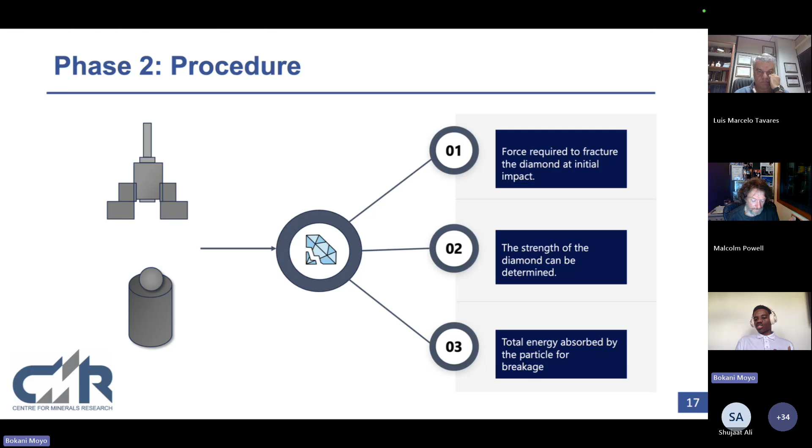So this on the slide is essentially a schematic of a short impact load cell. It's a very simple construction. All it does is you drop a weight and then you break your diamond, and then you can get essentially 3 parameters: the force required to initially fracture the diamond, the strength of the diamond, as well as the total energy absorbed by the particle for breakage.

So phase 3, this is where we do our DEM simulations. We have a range of parameters that we're going to investigate by keeping a few parameters constant, which is the steel ball size and the particle size. We'll then employ varying drop heights, different orientations - so where it's flat on its 111 plane, or when the apex is up - as well as look at the 2 shapes: an octahedral shape and a dodecahedron shape. So this is the plan going forward.

Before I finish, I'd like to thank Center for Minerals Research, Excite, National Research Foundation, CIMERA, and the EBE at UCT, and also lastly John Gurney for essentially donating the diamonds for this study. Thank you.

Great talk, Bokani. Lots of diamonds in there, and you're breaking them. Expensive stuff. But good. So up next in the line is Vivian. So Vivian, over to you, please. Take it away.

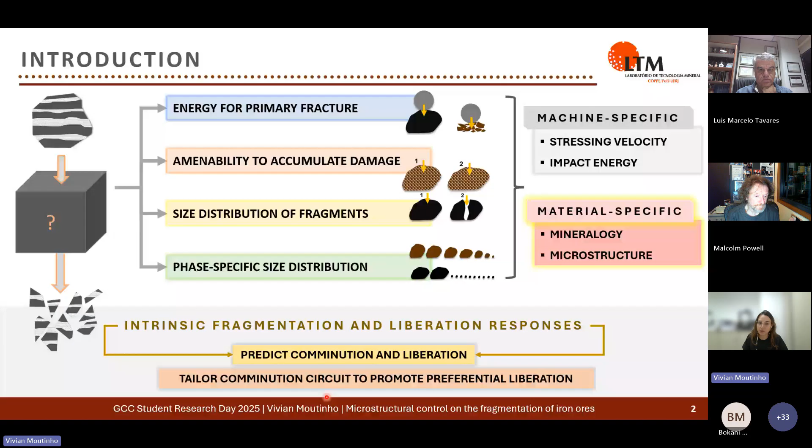If we are able to relate how these ore characteristics relate to the breakage and liberation responses of different ores, we are able to better predict the comminution and liberation responses of ores, and then tailor the circuits to promote preferential liberation when non-random breakage is relevant in the breakage of the ore.

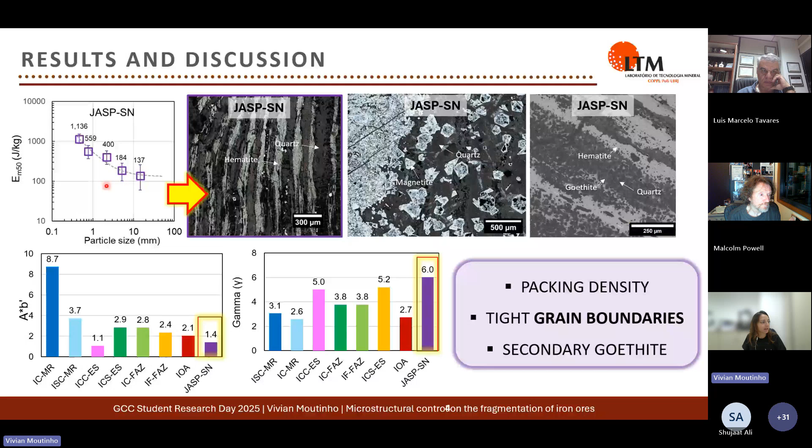Looking at two extreme cases: the jasper-like samples, which have very high packing density, tight grain boundaries, and cementing by secondary goethite, which causes this sample to show very high resistance to primary breakage, and explains also their low breakage intensity and low amenability to accumulate damage.

When we look at the other extreme, we have the compact itabirite sample, which is very typical from Brazil. Its oriented grains of hematite, weak grain boundaries, and high porosity explain its low resistance to primary breakage, its high breakage intensity, meaning it fragments into fine particles after breakage, and its high amenability to accumulate damage.

When we look at the way fragments are distributed in the different size classes, we can see the difference in the size curves for all the studied samples. The two extremes here are the jaspilite sample, with a very uniform distribution of fragments among all size classes, and the compact itabirite, with almost a bimodal distribution of fragments.

When we look at the mineral deportment in the different size classes, we can see a higher difference between hematite and quartz for the compact itabirite, indicating its preference for preferential breakage. The jaspilite sample shows a very uniform distribution of quartz and hematite among all size classes, indicating its natural susceptibility to random breakage.

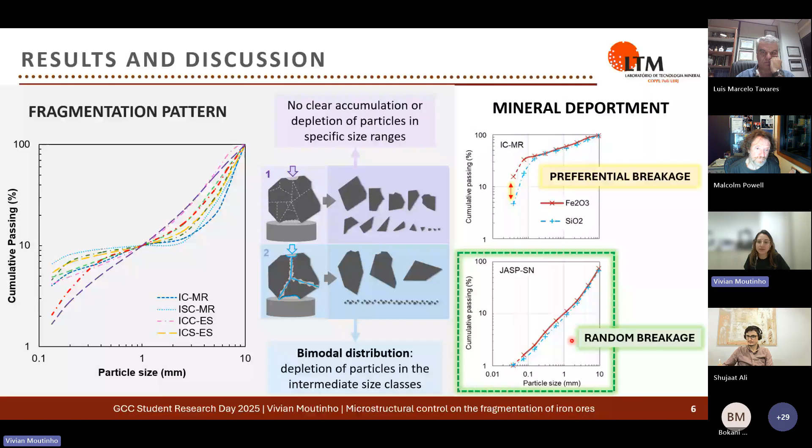The next stages of this study involve the quantification of ore properties, the assessment of intrinsic liberation responses through MLA analysis before and after controlled breakage of single particles. We are also going to assess the proportion of intergranular and transgranular fracturing.

We will associate all of these breakage characteristics with the mineralogy and texture of iron ores in a more mathematical way, with the final objective of predicting breakage behavior and liberation responses through ore properties. Thank you, everyone, for the attention.

When we are looking at comminution processes on an industrial scale, we can usually find an extremely diverse range of products, which can be the production of construction materials, the processing of ores, and also applications in recycling. Especially for ores, it's more or less impossible to predict how and where a particle is going to break when we are looking at the extremely heterogeneous structure of these particles.

Also we have to keep in mind that for multi-component comminution, we don't want to achieve narrow particle size distributions, but we want to achieve a selective comminution, which helps us in the separation of valuable and non-valuable materials. In the past, I conducted various tests on the influence of the material hardness, for example, and also the influence of the feed particle size.

And one effect which has been discovered or seen quite often is the so-called protection effect or shielding mechanism. Large particles are protecting finer particles from being stressed by the grinding medium. And right now I have the idea to incorporate this effect into my population balance model.

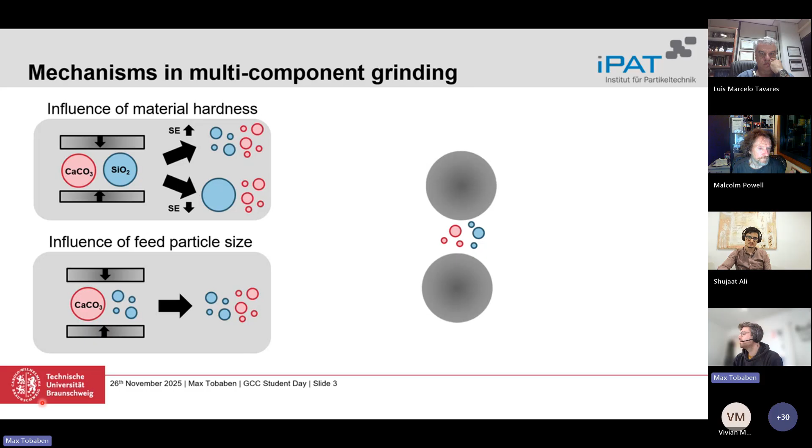Therefore, I want to get a quantification or at least a correlation of process parameters and the protection effect. I want to use a drop weight test, which consists of a magnet and a steel ball, and the steel ball is usually falling on a particle layer. It's a monolayer, which is arranged on a pressure measurement foil.

The arrangement of particles is usually done in a hexagonal way, and we can either test same-sized particles, but also particles with one protecting particle located within the center. With my test, I do some evaluation. The first one is the pressure measurement foil underneath the monolayer, which gives us an idea about the pressure pattern. And also we're getting video images to see how particles are being stressed.

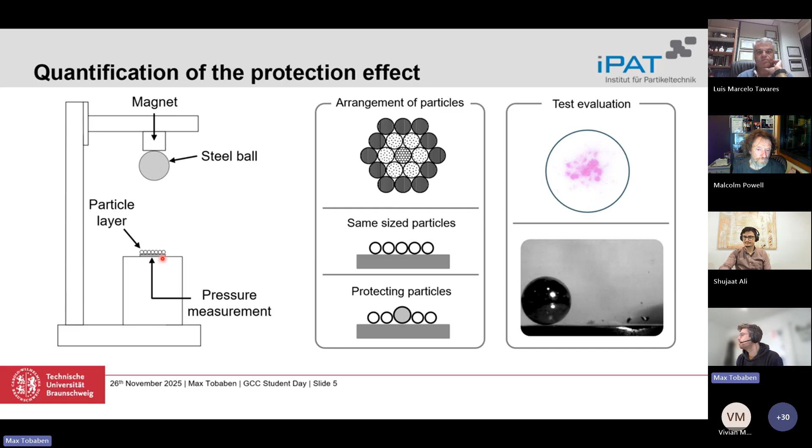Within the future, there are some more investigations planned. This is only the first trials, and we want to do a variation of the particle size ratio, variation of the ball size, and also variation of the stress energy, to find out correlations which can be implemented into population balance models. Thank you.

Thank you, Max. Great talk. Really enjoyed it.

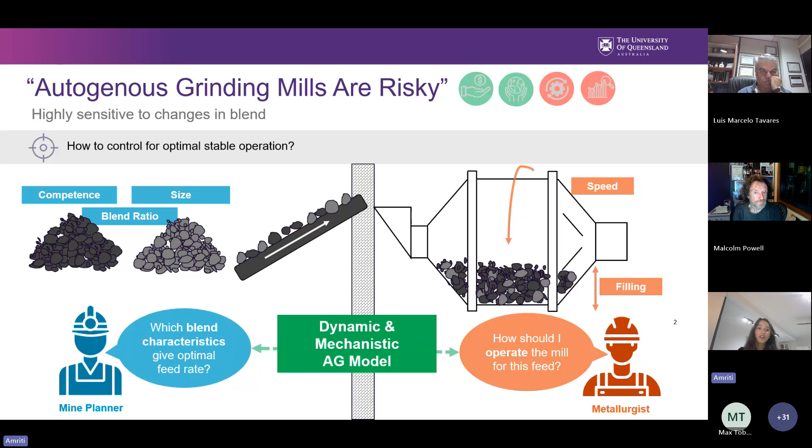This has really sparked a lot of interest into whether we can build a fully dynamic and mechanistic AG model which incorporates the effects of blend characteristics and how we actually operate the mill. There have been many efforts put into modeling the individual sub-processes that happen in tumbling mills. However, we're still not at a condition where we can predict how mill content evolves with different blends and what the corresponding breakage response is.

What we often see is if there's lots of competent material in the feed, the mill will build up. Alternatively, if there's lots of soft material, the mill will underload. These are examples of currently unpredictable mill behavior, which leads to instability. So the aim of this research is to understand what causes these effects, and hopefully integrate the findings into a fully dynamic and mechanistic model which really builds on the existing work done in this space.

To do this, we need to build a robust data set which maps out mill performance over a range of different blends, characterized using both novel ore characterization methods as well as classical methods. From there, for each feed condition, we construct grind curves using locked cycle pilot tests using a pilot mill. The critical part of the experiment is actually measuring and characterizing the mill content.

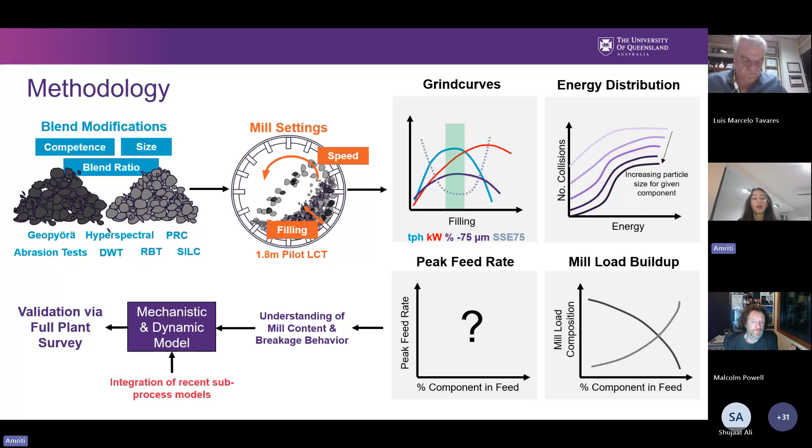With that, we'll have a very rich data set showing how feed content, mill content, and product change with different operating conditions, which will give us insights into how the breakage environment affects mill performance and where we're getting optimal and suboptimal performance. From there, we'll integrate the findings and build the framework for a mechanistic model to validate at full scale.

So there's lots of value in this project, especially now that we have faster and more accurate ore characterization methods. Developing the understanding as well as the tools to make more informed decisions regarding what gets mined, what gets blended, and how to operate the mill can really help mining companies attain both production and energy reduction targets. With that, I'll conclude my 3 minutes.

Perfect, perfectly great on 3 minutes. Actually, a little below 3 minutes. Great talk, really enjoyed it.

So with that, the last presenter for today and for this competition is... please forgive me if I pronounce your name wrong... Thales Santiago from UFRJ. Thales, oh, I'm sorry. Can you hear me? Yeah, Thales. Okay, take it away, Thales. Let me share my screen for just a moment.

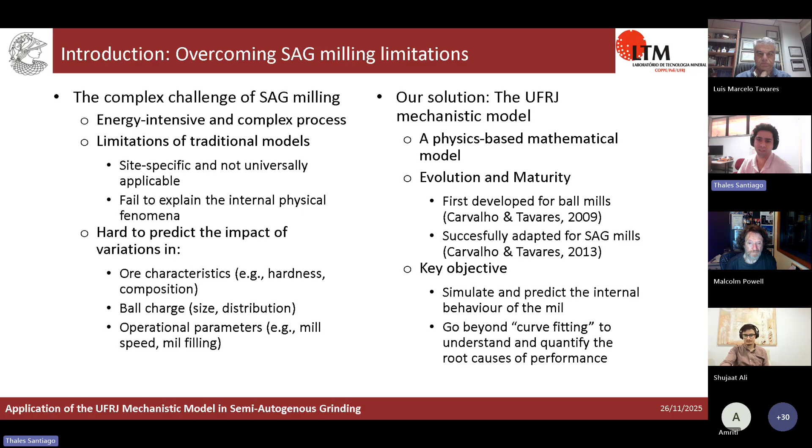Here's how it works in practice. It starts from a known initial charge. The DEM simulation generates collision energy spectra. This data feeds the mechanistic model, which calculates particle breakage and transformation, and damage accumulation over very short time steps. Crucially, when the charge changes significantly, a new collision energy spectrum is generated, and then the cycle restarts. This iterative process allows us to track the evolution of the internal charge accurately over time.

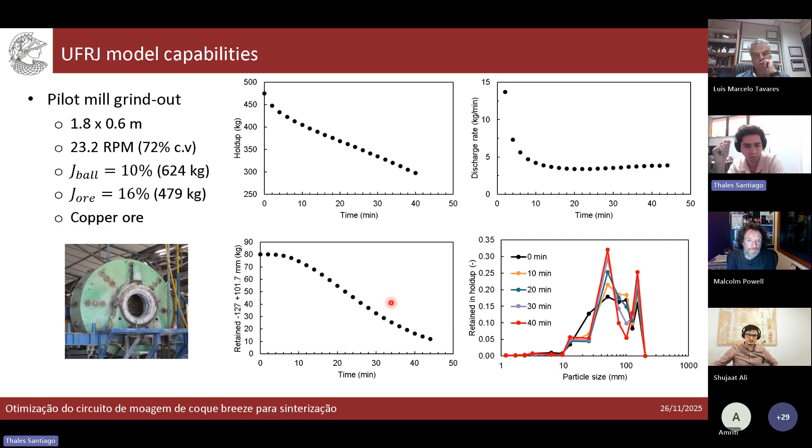The next critical step in our ongoing work is to validate these curves against experimental data from a physical mill. This validation is essential to confirm the model's accuracy and its ability to truly capture the complex physics of SAG milling. Thank you very much. And that's my contact info for further questions.

Brilliant. Okay, so that was the conclusive talk for the day, or night, or evening, or morning, wherever you are. We are a bit behind schedule, so let's jump straight into questions. I see a big pile of questions in the chat already, and we need to respect some time, so let's get going. We'll see how far we can go, and we may need to skip some questions.

So the first question is for Vivian from Rodrigo: can you comment more on the relationship of breakage model parameters and iron ore type?

Yes, thank you for the question. I didn't have time to present all of the results today, but we found some interesting relationships, for example with D0, a parameter from the model that describes the variation of median specific fracture energy with particle size. D0 represents the characteristic size of the material's microstructure. We found that for typical itabirites, which are controlled by the reactivation of intergranular fractures, we found lower D0 values, while for samples mostly broken by reactivation of larger fracture networks acting more as brittle materials, we found higher D0 values. I think this is the most relevant relationship we found from the breakage model parameters. I hope it answers the question.